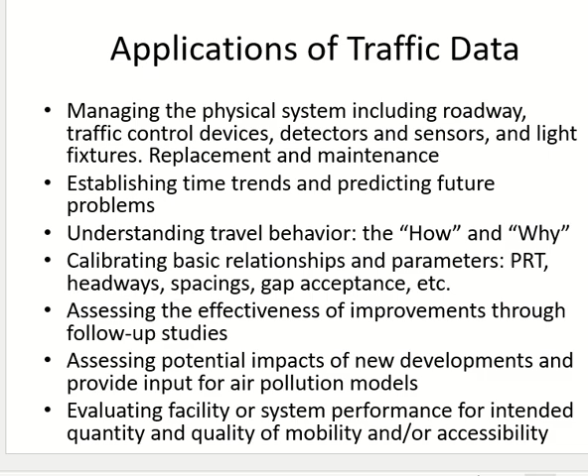Okay, so we are doing this chapter about traffic data collection and reduction, and we have talked about the outcome we are covering: why do we need traffic data, what is the modern purview, what are the sources, the methods of collecting the data, after you collect the data, in which applications you can apply it, and what are the different traffic studies we can do. Okay, and we discussed all of them.

Now we move to the different methodologies of traffic data collection. We can have manual, semi-automated, and fully automated methods. So these are the methods, not the type of studies. Type of studies we already covered in the last lecture. So this is how, not what, or why. What we are covering up to now is what and why. This is how you can collect traffic data, and there are three main types of methods.

We start with the manual technique. So manual means what?

Yes. Yeah. Written, okay. So we are talking about traffic data collection. Okay, so both of you are correct. You are doing it yourself. You may have to note down the values yourself as well, but you may not have to write it every time. Noting down is the correct word, recording it yourself, but you may not be recording it on paper or on a tablet or something, but you are there and you are recording it.

Okay, so you are young people, healthy, mashallah, right? So how many hours you can do it? You already done it for 15 minutes, right? So how many hours? 1 hour. 2 hours. 3 hours, sure. Okay. You want it to be more accurate with your project, right? No. Yes. No? Yes, 3 hours. You will not even finish the project. 15 minutes is enough. The caps are increasing.

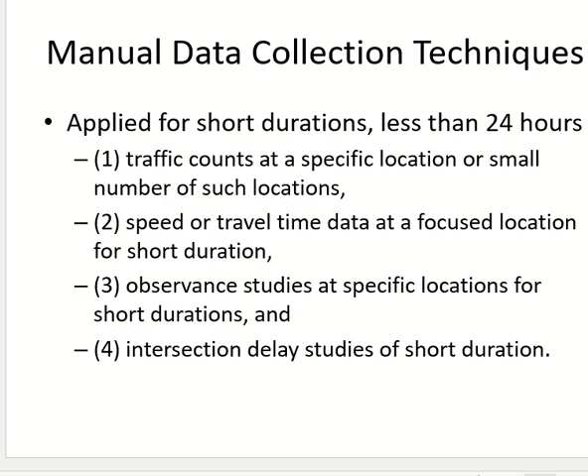And then we have intersection delay studies, again short duration as I already mentioned, and these delay studies are also done manually. Why - we will discuss them later on. It's a complete topic, and there you will see why manual observation is important.

If you are doing manual counting, somebody mentioned we have to note it down. So we don't always note it down with pen and paper - we can note it down using these counters as well, which I showed you at the start of this lecture. These are handheld counters, and you can use them as well.

When using these counters, say I need a value after every 15 minutes - even if you're writing on paper, you need to make some division, since 15 minutes ends here and the next 15 minutes starts. So either you note it down on paper, or if using the counter, you note down the value for 15 minutes and set the counter to 0. This will take some time, maybe 1 or 2 minutes, and these are not the only things you will need to do in the field.

Okay, you may have to drink water. You may have to change your shifts and so on and so forth. So all this will take time, and this time has to be incorporated in a systematic way. The time which the observer needs for doing anything, personal or related to the data, in which he needs a break. That break needs to be incorporated in a systematic and uniform way.

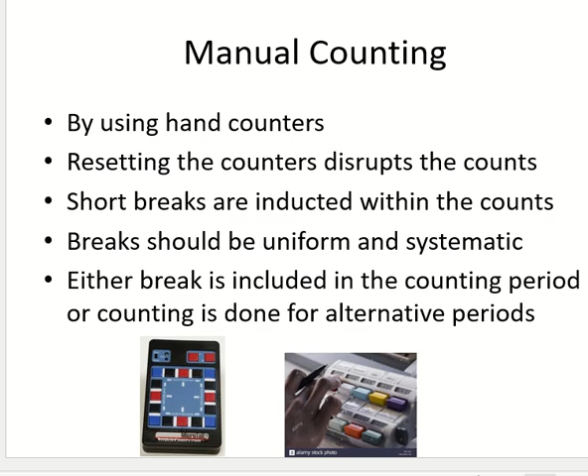There are two methods to fix this. One is called the alternate period, and the other one is having break within the counting period. So there is within and there is alternate. Having break within the counting period means that you have a total counting period and some portion of this counting period is specified as break.

So when he gives you the value, you know he is not giving you the value for the total period, he is giving you the value for a part of the period. For example, you tell him, give me a value for every 5 minutes, but in every 5 minutes you have a break of 1 minute. So in the end, his value is for how many minutes? 4. This is having break within the counting period. The break is short, the counting period is longer, and the value which you are getting is including the break.

And then we have alternate break period. You tell him the counting period, and after the counting period he has the same time for the break as well. So counting period, break, counting period, break, and the duration is same. If it was 5 minutes: 5 minutes counting, 5 minutes break, 5 minutes counting, 5 minutes break. Both are equal, and the value which you are getting is without the break. The break comes after. So when he tells you my value for 5 minutes is this one, it is actually for 5 minutes.

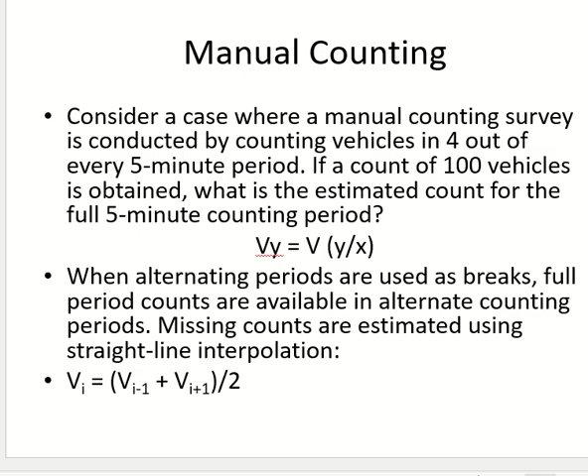And this happened, by the way. In a class they were saying, oh, we will do interpolation. What will we do? We will take the average. Average means interpolation. Average doesn't always mean interpolation, but in this case, no problem, because it's alternate and it's the same time. So interpolation in this case will mean average. Got it? In the first case, you convert to unit rate and multiply by the number of minutes you want. In the second case, interpolation or average. Clear?

So this is an example of a highway which has 4 lanes, 2 in each direction, and we have 2 observers. We will have this discussion later on as well. You will see in other examples that when you are counting and you have a number of lanes, a more accurate approach for manual counting is to assign one observer to a lane. The counting becomes easier for him because there are no parallel crossings, and one lane means one.

Unless you are in Karachi where they have lots of bikes and so on. But here it's controlled slightly. The bikes are increasing, by the way, so you will see the effects. But in one lane, it's supposed to be one by one, so the counting becomes easier and more accurate as well. With parallel crossing, you have more chances of missing the count. So this is what they are doing.

They have 2 observers. You can see at a time I have how many values? 2 values. So these 2 observers are assigned to one lane at a time. But the data is required for all lanes, and you cannot assume that they will be the same. 2 lanes in the same direction do not have an equal amount of traffic. You know that, right? So we need some data from the other lanes as well.

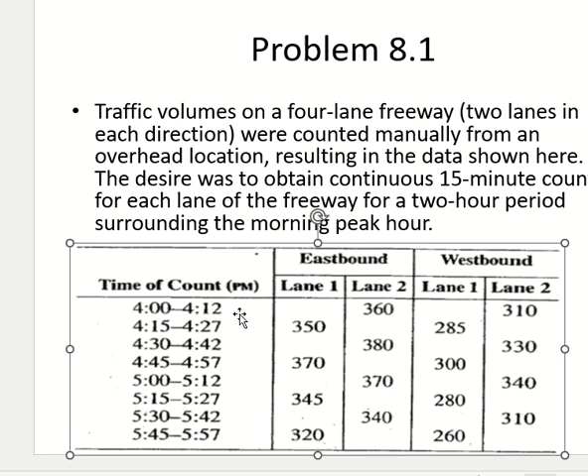So first of all, we will try to fill these gaps. When I fill the first gap, the 3-minute gap, the time will become from 4 to 4:15. I don't have a value here, but I have a value here which is 360. If I have 12 minutes and want to make it 15 minutes, what do we do? Divide by 12 to convert it per minute, then multiply by 15, since 12 plus 3 is 15. So 360 divided by 12 multiplied by 15 is 450.

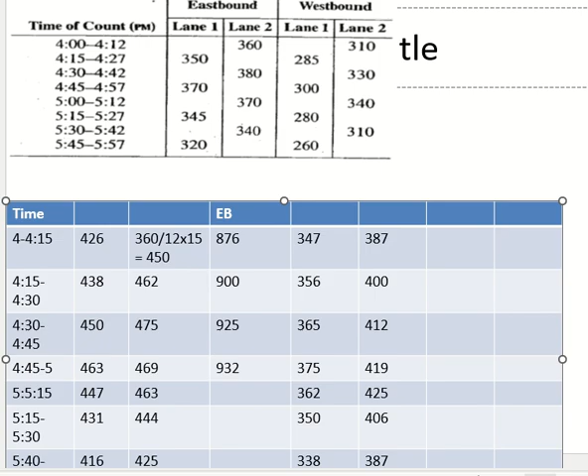I don't like the odd numbers. My mind blocks. So I see 3, 9, and 7. Cannot do it. Yes. 9, 9, 10. 8, 7, 5. 8, 4, 1. 8, 4, 5. This one? 8, 0, 6, right? Okay. This one? 8, 4, 1, not 8, 4, 5. 8, 4, 1.

7, 3, 4. 7, 5, 6. This one? 7, 7, 7. This one? 7, 9, 4. 7, 8, 7. 7, 5, 6.

Hmm. 6. Okay, this was for each direction, then this will be the total of both directions. Okay. Now in the question they are calling it a freeway. So freeway is the name of the highway. Okay, freeway is the name of the highway.

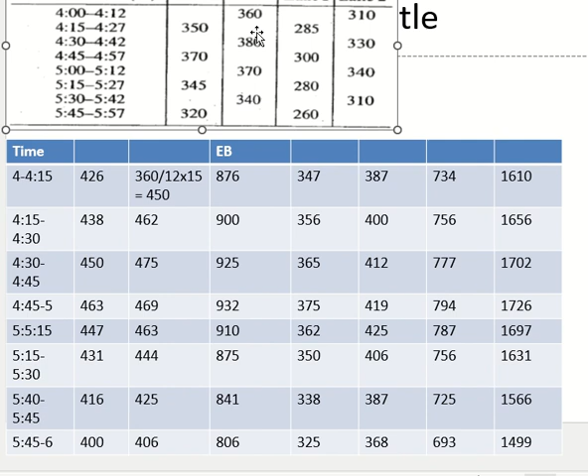So at least when you look at them later on, you don't have this confusion: this is an average, this is an average, this is an average. What happened to the 4th one? It was also supposed to be an average, but somebody made a mistake. So try to be okay with the class. When we are calculating these values, don't think, these are the numbers, I'll take a picture and everything will be downloaded in my mind automatically. It does not happen like this, especially when you look at it after 1 month.

So now we have count of every direction for 15 minutes and for the freeway as well. Where is the count of the freeway? The last one. Okay. Now the next step is to calculate hourly counts. I'll just do it for one direction, and you repeat it for the other direction as well as for the last column. We are calculating hourly count so that we can know the peak hour.

So first of all, tell me how many hours of data I have. 2 hours of data, right? And what is my time interval duration? 15 minutes. 1 hour has how many 15 minutes? 4. So if I make sets of 4 15-minute intervals, each set will be 1 hour, right? So this is a set, starts from 4 and ends at 5. Is this an hour? Yes.

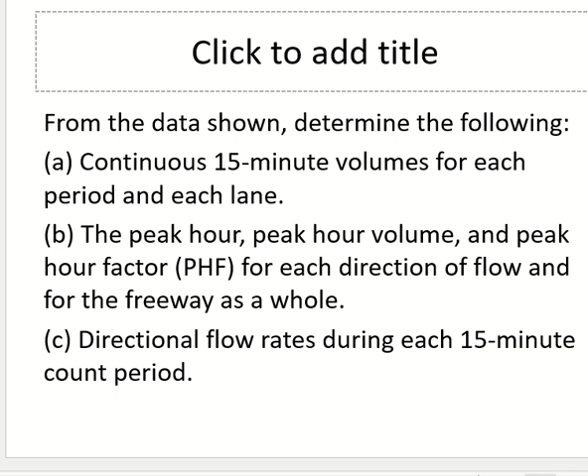The last step. Each of these values, this column, this one, and this one, is for 15 minutes, right? If we forget about this one, all these values are for 15 minutes. What do we call a count which is taken for 15 minutes? Volume, right? And how do I make it flow rate? Convert it to 1 hour. And how do we convert it to 1 hour? Multiply by 4. So the last part of the question is you convert each of these values to flow rate.

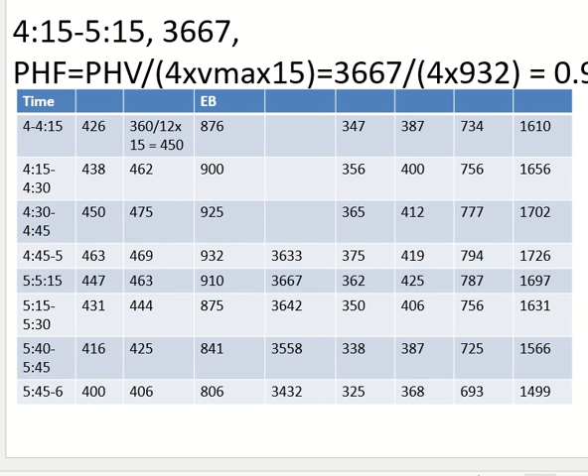And you can see the answers over here. The flows are given. You may see some small difference because of decimals. I may have done rounding up or rounding down, so plus minus 1 or 2 is no problem. For each value they are converted to flow rate, for each direction. Okay, good. Any problems? Any questions? Is it clear? Okay.

The next thing which you have done is speed studies, still talking about manual methods and manual techniques. If you are doing speed studies manually, the most convenient method is to measure the distance, have a stopwatch, let the car pass the distance, and measure the time. So speed comes as distance upon time. That's the easiest method.

So it has a lot of error, yes, a lot of error. But it's still the most convenient method, right?

Filming is more convenient, like taking a video is more convenient. Sorry, taking a video, are you in the same group? No? The video has some other issue, we'll talk about it.

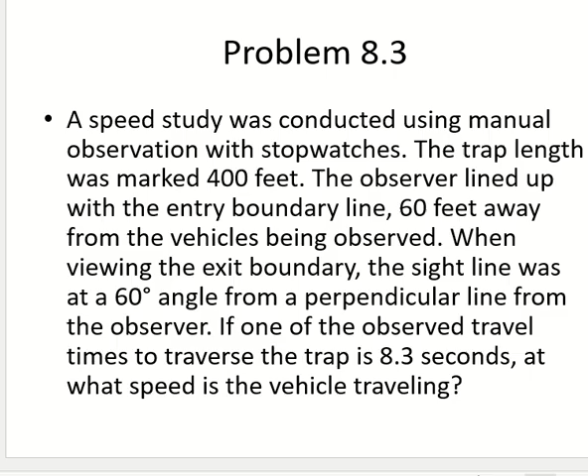When my line of sight is straight, I have exact alignment of the car with the road. I'm looking straight, so the car is at this point exact, no problem. But when my line of sight is tilted, I can no longer say with confidence at what point of the road the car is when I'm taking the time. This is called the parallax error.

This is because of the tilting of your line of sight, and obviously you cannot completely control it. You can minimize it, but you cannot control it.

The other one is because of the manual observation of the stopwatch. These are random errors. So when you are operating the stopwatch, you are clicking it, right? Your click may not always be in sync with the motion of the vehicle. You can be a second behind or a second forward, and you do not know about it. It's not like you are always making the same amount of error in every observation.

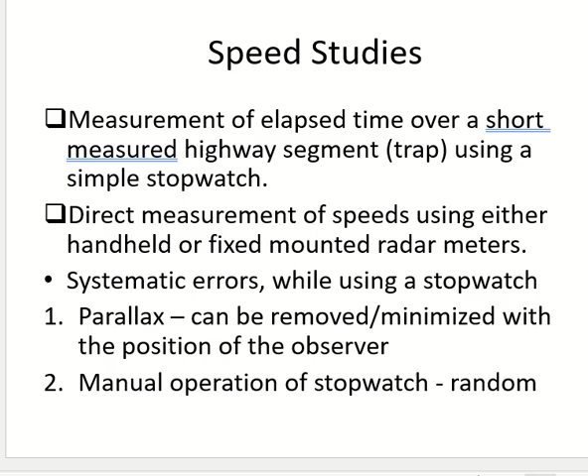Got it? Clear? If you have the parallax error, what do we do about it? The question is written here, but I will directly go to the figure. In this question, they have given us a case that the observer is standing 60 feet behind the road. So the observer and the road are 60 feet from each other. From this, when he looks at the starting point, there is no problem.

So if I want to calculate the accurate speed, I should not do D upon time. I should do D effective upon time. So how do I calculate D effective? I know D and I know the angle, so D effective is what?

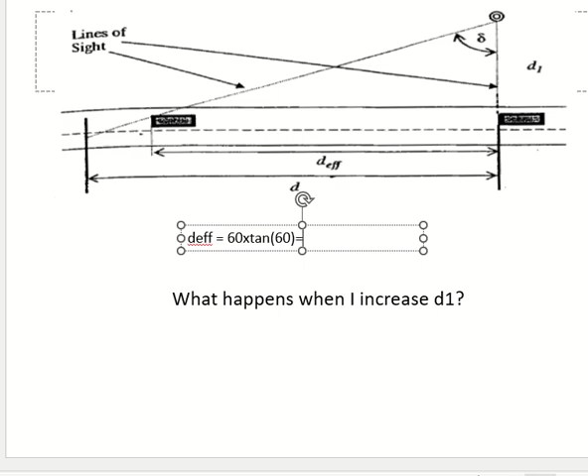Okay, so how much is this? 103.9 feet, because 60 is in feet. Now if I want the speed, then it will be 103.9 upon time. The time is given as 8.3 seconds.

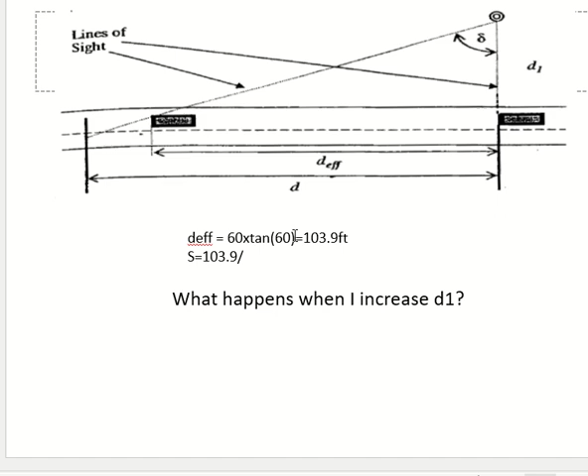Okay, clear? So if you want to see the effect of the position of the observer on your error, you can adjust D1, keep the angle same, and see if the error is increasing or decreasing. So you would know, as an observer, should I stay close to the road or behind the road? Because this error is not random, it will not cancel out. Every observation will have the same D effective and the same difference between D and D effective, so it will not cancel out. So if you want to reduce it yourself, look at this equation and see how you can reduce the difference between D effective and D. Your parameters are D1 and delta. So if I increase delta, what will happen to D effective? If I decrease delta, what will happen to D effective? So you can have an idea about your position. Okay, clear?

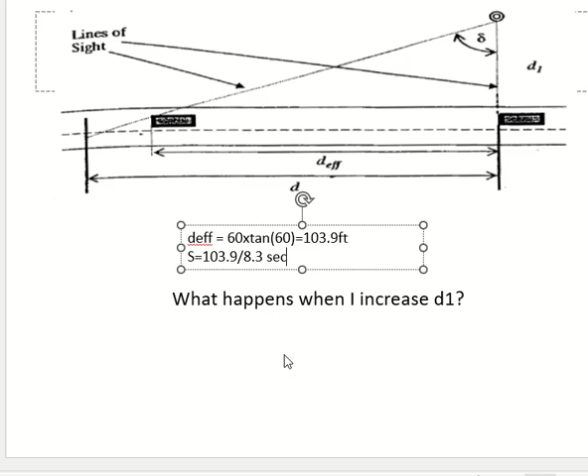Some points about speed studies which you should keep in mind. First, we are looking for the most normal and average speed on the road. The speed studies are done to find out the most normal and average speed of the road. But there are people who are coming from Formula 1, right? They feel they are Vin Diesel with the hair, so they are going very fast.

Or some of them are coming to my class, so they are out of the house but they don't want to come, so they are going very slow. So they are not normal. It's not him. Going very slow? No, normal, he is normal. Don't worry about yourself.

So we don't want this. If you feel the car is going very slow, the practical reason is that for very slow cars there could be a problem with the car, or something else which is not the case with 99% of the drivers. So including his value in the data will deviate the average towards the lower side. Because of this one or two values, my average can drop by 5 to 6 kilometers per hour, just because of these one or two guys.

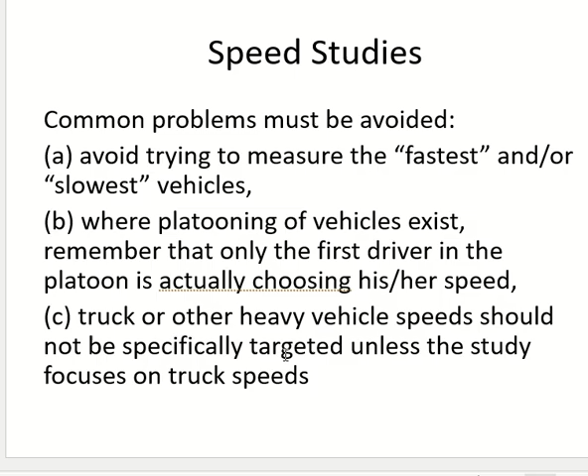And the last one is, heavy vehicles should be avoided. The reason is the same as the first one: heavy vehicles are slow because of their own nature, not because of the road. They are heavily loaded, they have large bodies, they have to go slow, otherwise they will lose control. So these 3 points you have to keep in mind for your speed studies as well: try to avoid extreme values, don't take into account heavy vehicles, and if you have enough length, avoid doing it just after the intersection; but if you are doing it, focus on the front line of the vehicles.